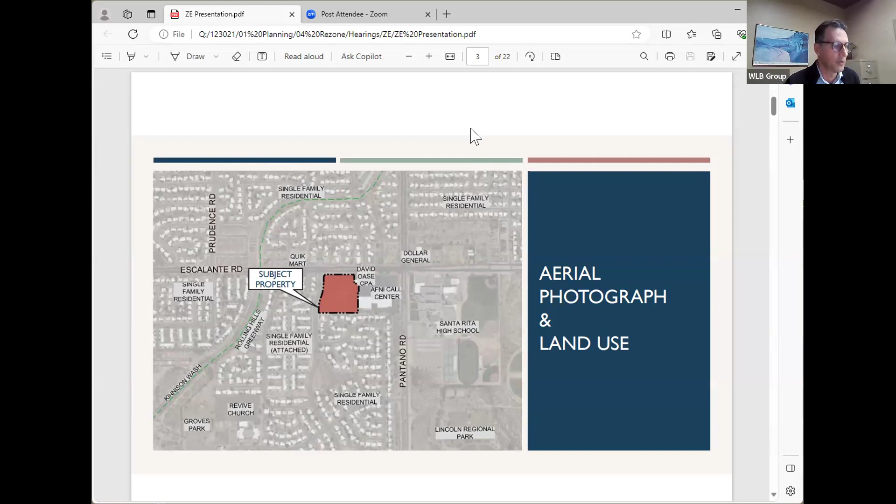Just want to take a minute or two to review the proposed site plan. The site itself offers 53 single-family detached residential lots. As Gabriel mentioned, the project is proposed as an FLD. It provides functional open space as required by an FLD in the form of walking paths, sitting areas with picnic tables, dog walking areas, and also a little library that Pepper Viner likes to include in their communities.

It's for sharing of books. The community will be attractively landscaped, and required landscape borders are provided along street frontages, as well as along the east boundary adjacent to the commercial property to the east.

Vehicular access points are located in accordance with City of Tucson standards. Guest parking areas are compliant with City of Tucson standards, and we've spread them throughout the site to make them easy, accessible, and convenient. The project will also provide a new 6-foot wide sidewalk along the western boundary of the site, on the eastern side of Evergreen, and this will fill in a gap where a sidewalk is missing. It will connect to an existing sidewalk just to the south of the site, and to the north, it will connect to the existing sidewalk on the south side of Escalante.

If I may touch for a moment on planning policy compliance, as Gabriel mentioned, any rezoning proposal must meet certain criteria, and of particular importance is compliance with planning policy documents. The project is compliant with Plan Tucson, the South Pantano Area Plan, and the Groves Neighborhood Plan.

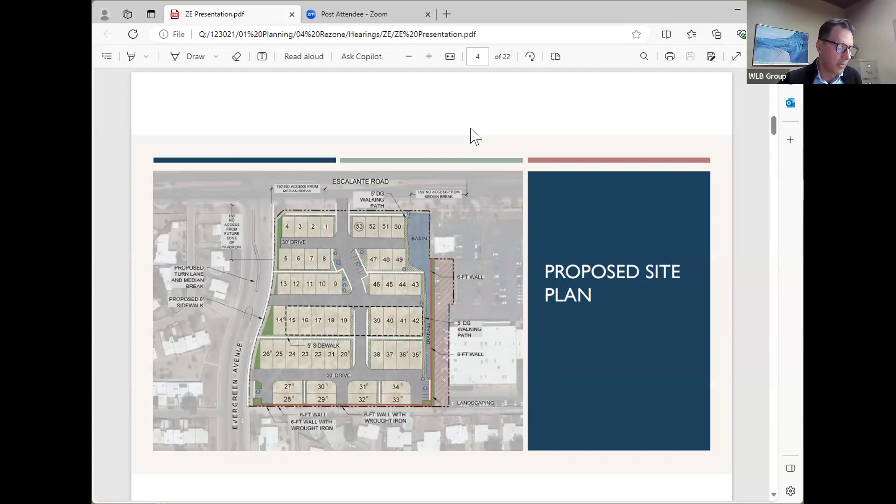Last few things: the staff report and the conditions of approval. We have read the staff report and agree with its findings. We are also in agreement with the proposed conditions that Gabriel mentioned. Thank you for your time this evening. My team is available if you'd like further discussion on the proposed project.

Thank you very much, Mr. Longacre. I don't have any questions at the present time. Would anyone else in the audience like to be heard on this case? Hearing no one, I'm going to close the public hearing on case TP-ENT 1023000042, Pepper Viner, East Escalante Road.

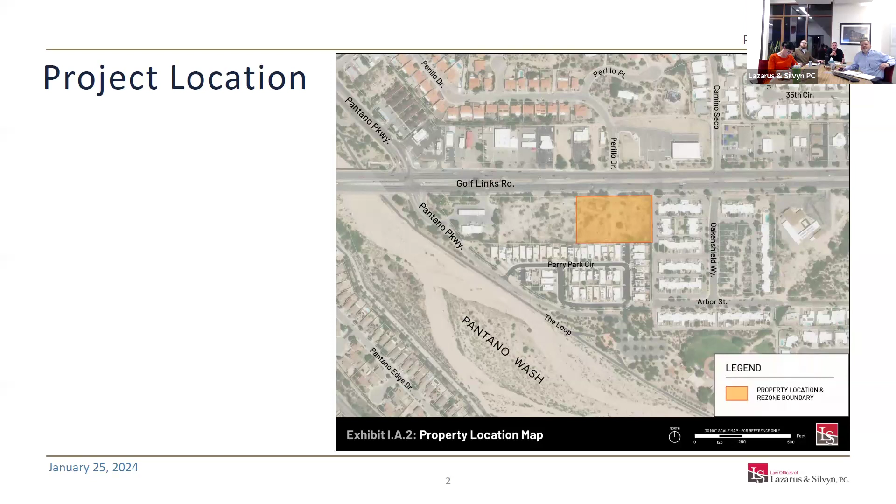Great. So our location is on the south side of Golf Links, just east of Pantano Parkway, about 3/4 of a mile west of Harrison Road. This is part of a vacant strip of land that you're probably familiar with, with a couple other cases. This property is part of a larger area of C1 zoning, which is fairly original zoning from the annexation. But over time, part of this area has become residential, so the C1 zone area to our south has become single family residential.

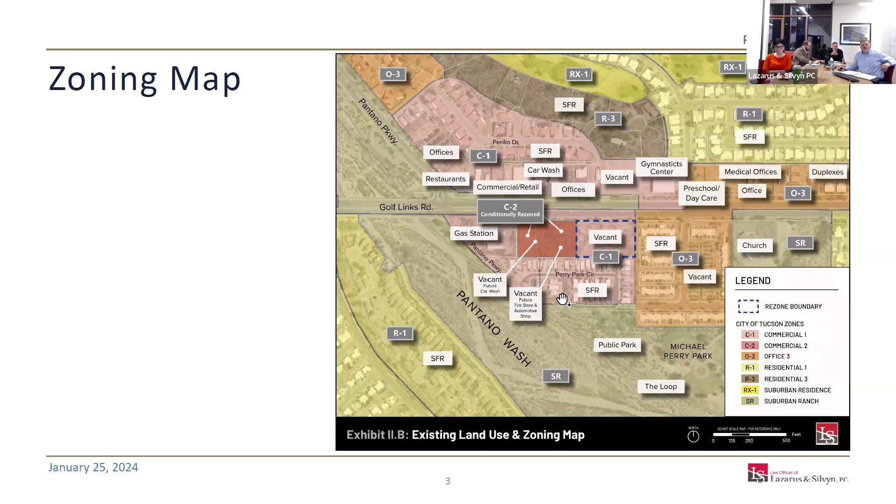On the north side of Golf Links is also some area that's C1 that's become single family residential. But right along Golf Links itself, at least in our area, it's been developed and continues to develop as commercial uses primarily serving the surrounding areas. Circle K was developed in the late 90s, and most uses on the north side of Golf Links are older, though there are a few newer buildings.

The 3 parcels where our property is have really just been recent. I think we were before you in the summer, September 22. That was authorized by Mayor and Council, and a few months ago the final ordinance was adopted for the tire shop in the middle of this stretch of vacant lots. Then earlier in '23, you saw the car wash proposal. Both were rezone requests to C2 because C1 didn't permit those uses, so there was really a need to rezone to C2.

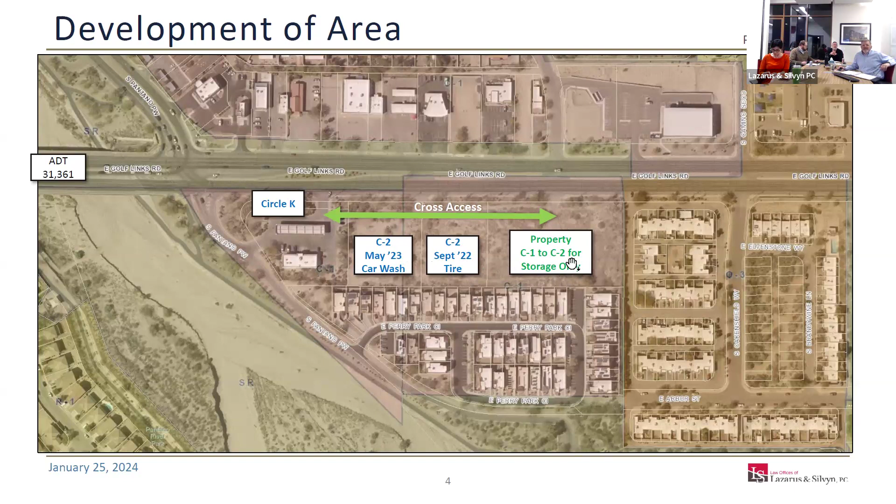We are asking for C2 zoning as well, but our case is a little unique because in C1, personal storage is allowed. It just comes with some fairly restrictive, and I think outdated, use standards requiring that if you're in C1, storage can't be higher than 16 feet, limiting it to 1 story. It's really a code provision that I think envisioned the old style of personal storage.

As you've seen with some of our other cases, and just by looking around town, storage has really evolved. Most new storage is in self-contained buildings with multiple stories - we're requesting 3, but that varies. They're climate controlled, and most of the loading is done from the interior. So they're just a different form of building that requires more height, and that's why we're asking for this rezoning.

But like most storage, it's very low traffic. The customers don't come that often. Really, the traffic is mainly the employees and then just a few trips per day from customers. Overall, low traffic and low nuisance impacts as well. So we are asking to go to C2.

As you probably know, C2 allows for height up to 40 feet, but our project is lower. C1 has a maximum height of 30. We're asking for 34, kind of in between those 2 maximums.

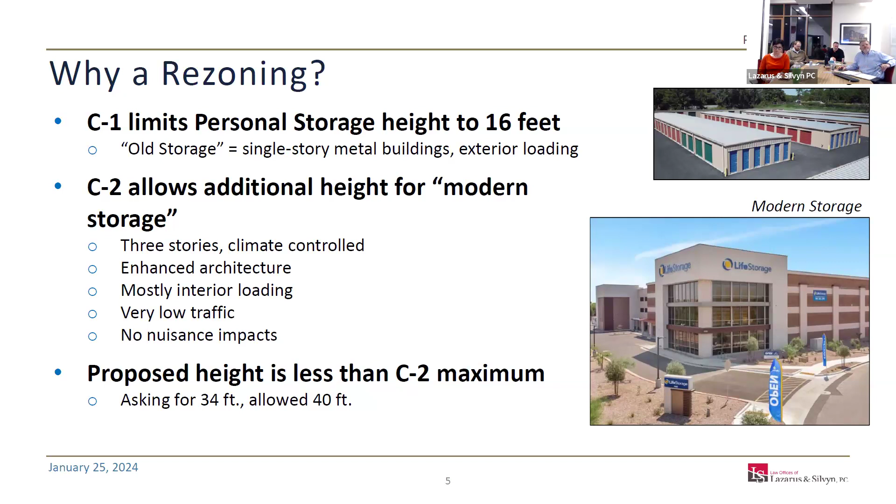So here's our site plan. I just want to walk through a little bit of how our site functions. I'll start off with traffic circulation. Almost all the traffic is going to come to and from Golf Links.

Mr. Slater mentioned in the plan conformance that with our project, and all these projects from the Circle K all the way down to ours, there's a requirement for internal cross access. So there will be connections, and there's a cross access agreement already in place that would allow somebody getting gas at the Circle K to get a car wash, check their tires, and maybe end up at the storage, all without exiting onto Golf Links. It's cross access all the way across the strip. I think that was the intent when this was put in, to help relieve some of the traffic on the arterial.

We have essentially a ring road around our building. Almost all the units will be accessed from the inside, but there is some demand for drive-up units, so we're including a few of those on the west side and a few on the east side. For the most part, most of the loading in this project is going to occur on the north side of the building, where you see 3 parking spaces.

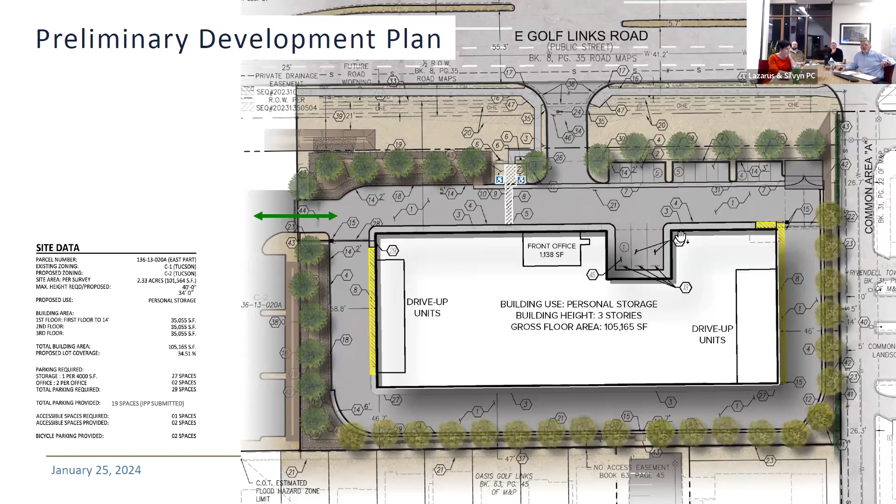We're providing 19 parking spaces on this plan, not including the 3 loading spaces, because under their code those are technically different, though in this case they're really not - the loading spaces are just going to be parking spaces. But the code does require 29 spaces for this use.

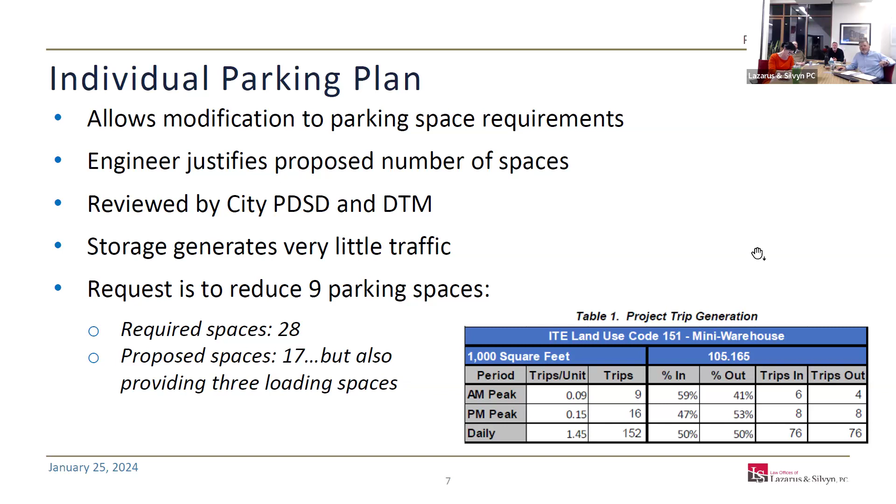Just quickly wanted to show you the architecture, the conceptual drawings for how the building will look - a lot of metal siding, with varying colors, definitely not just a stucco building. Our architect has put some thought into this.

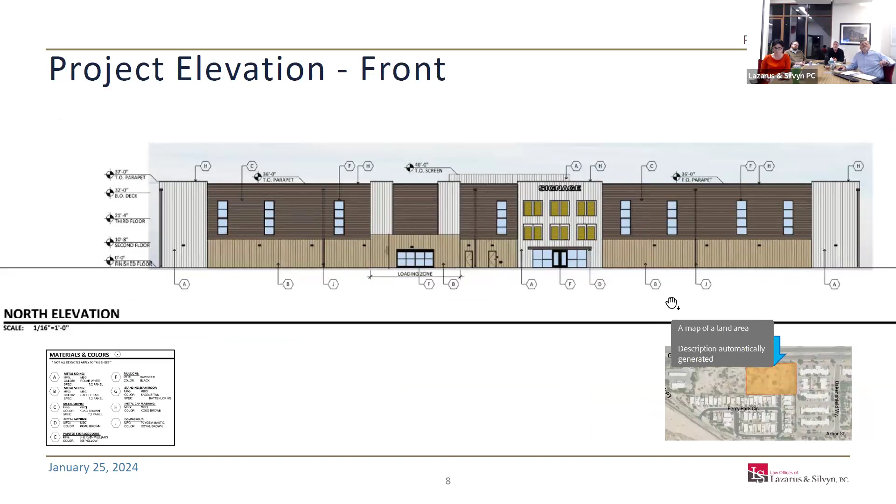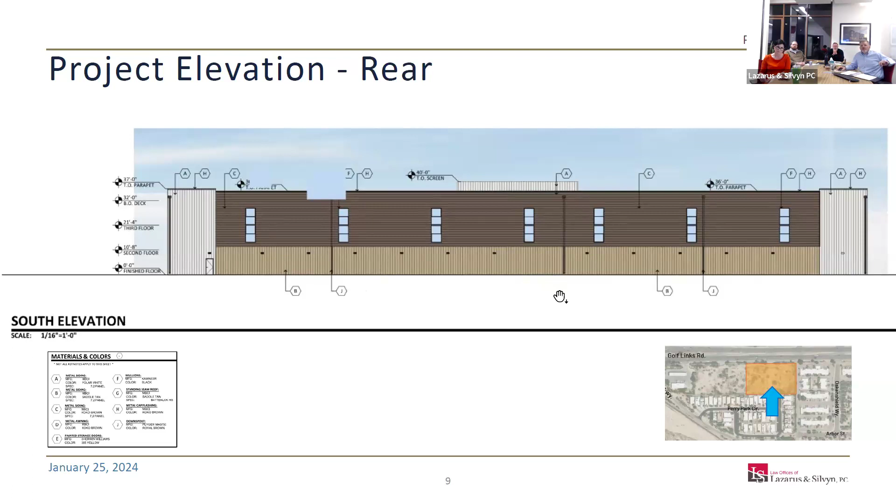The windows on the back - this is the north-facing, street-facing facade, and this is our rear facade. These are kind of spandrel windows; there's no view through them, they're just decorative. This is both our east and west elevations - again, not side windows, just glazing for architectural purposes.

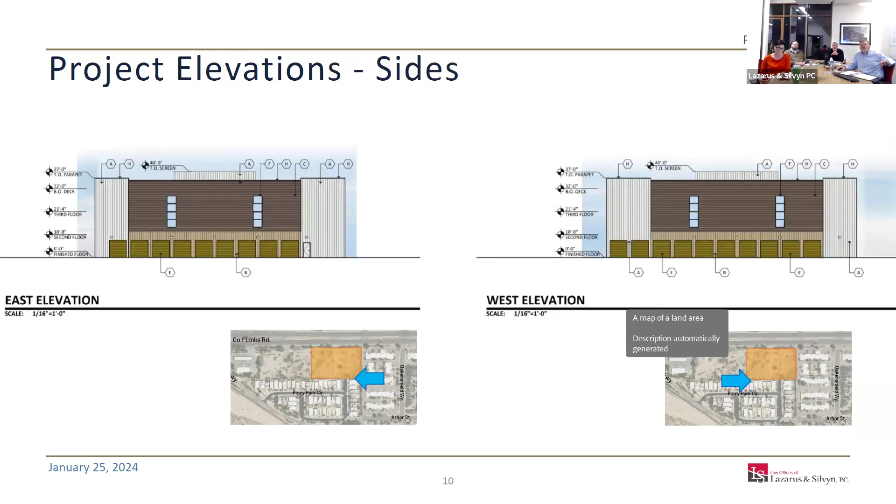So for our outreach, as Mr. Slater said, we did have a neighborhood meeting. There was one attendee who we were actually pretty familiar with from representing the tire operator next door. So we knew Mr. Todd, and he had a lot of questions, but they were all very good questions, and I think he walked away being satisfied.

We had one phone call from another neighbor just last week. He submitted a letter of protest and wasn't real happy with the project. But other than that, we haven't gotten any phone calls or had other interactions. We've obviously kept Ward 4 up to date on the progress as well. We did have 4 letters of support and 5 letters of opposition.

I did want to address a few things from the letters of opposition. A few mentioned a fear of decrease in property values. That's something that's hard to quantify, but I really think the opposite is true, that uses like the storage and the tire shop and other uses that develop in these commercial corridors are typical arterial uses.